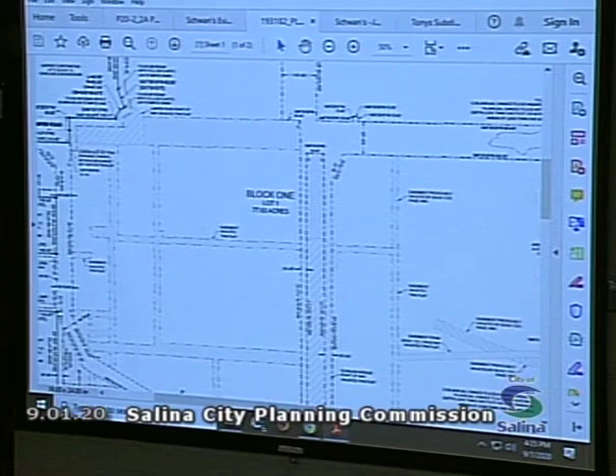So we met with the applicants after the Planning Commission meeting. If you could go to the plat layout, please, John, and zoom in on that, so that we can see what's happening over at Jumper Road. So that, you need to scroll over a little bit so we can see this right in here.

So this was the plat layout. This was presented to the Planning Commission at your August 4th meeting. And because this cul-de-sac was eliminated and not replaced, staff felt like the only thing the Planning Commission could do would be approve it subject to the condition that this remain as is, or they could turn this, eliminate it as a public street entirely and just make it private, in which case a cul-de-sac turnaround would not be required.

So this has been brought back with the applicant asking for the Planning Commission to reconsider your condition of approval at the August 4th meeting, and also requesting a variation from the requirement in the subdivision regulations that all dead-end public streets terminate with a cul-de-sac turnaround. And so this, from the applicant's perspective, this is the plan that they wish to pursue.

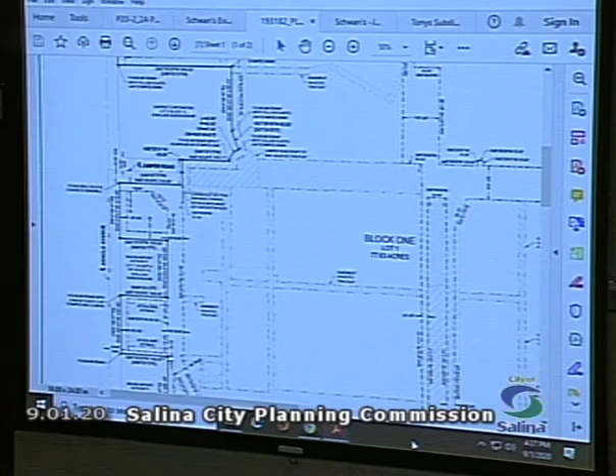At your places, was not present at the time of your packet, but at your places you should find a letter that looks like this. That's from UniFirst Corporation. That was lacking at the August 4th meeting, but that is a letter from UniFirst Corporation that says that they are in agreement with the vacation and elimination of this eastern portion of Jumper Road. John, there's a couple drawings in there that have highlighting on them about the reversion of right-of-way for Jumper Road.

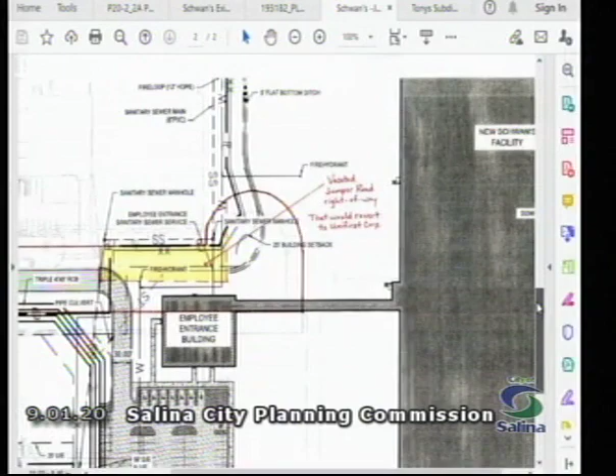Okay, so this is a blow-up of the project site plan. And if you can get it where we can see over it where it intersects with Arnold.

Okay, so this is Arnold Avenue here. This is Jumper Road. The proposal before you is to retain this part of Jumper Road, from here to essentially here, which gets it to where the driveway is for UniFirst, to retain that as a public street, but to not have that terminate in a cul-de-sac.

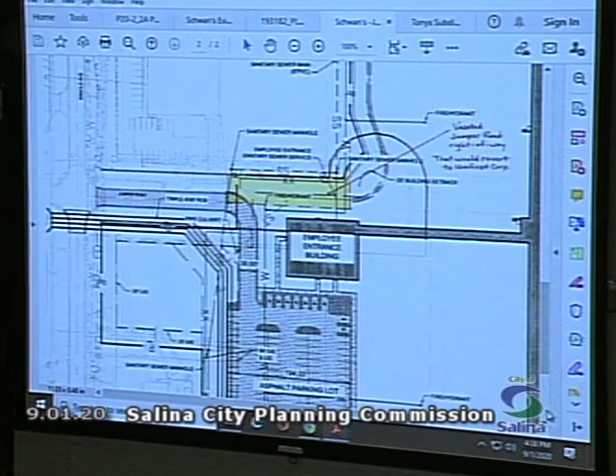So their suggestion as an alternative to that is that emergency vehicles, trash trucks, or others could come in and use this as a means to get back out.

The other important thing about this drawing is that this line right here is the south right-of-way line for existing Jumper Road. As you can see, this employee entrance building is located partially into where that current right-of-way is.

The other thing we wanted to show you, which relates back to the letter from UniFirst that we tried to explain maybe not very well the first time, is that when a street gets closed and vacated like this, it goes back half and half.

So the south half goes to the owner of these lots, the north half goes to the owners of these lots. So you cannot vacate and give right-of-way back to an owner unless they're willing to accept it.

And so the letter that you have at your places there from UniFirst says they are willing to see the street shortened and closed, and they're willing to accept back the vacated right-of-way.

There very well could be a side agreement between UniFirst and SFC Global to transfer the ownership of this to SFC Global, but by law, this automatically goes to UniFirst and not to the applicants on the plat.

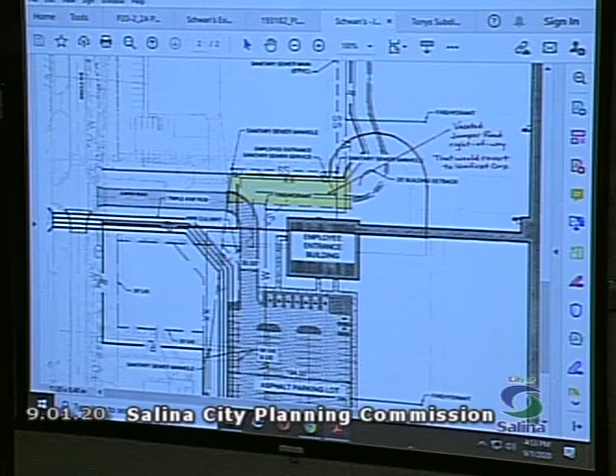All right, I've got, if you guys want to take a copy of each of those, I don't know if there's enough for everyone. That is directly out of the code book, so if you guys want to read it, you're welcome to do that.

I would tell you that parking lots generally don't work very well for fire apparatus that are 30 feet or longer. We just purchased a new Quint. It was approved by the City Commission that we'll take delivery of December of next year. That Quint happens to be 37 foot 10 inches, which is 38 feet. I don't know if any of you guys drive like a crew cab pickup or anything with an extended cab, long bed, pull into a parking lot and try to get turned around.

That's not the way emergency traffic is intended to work. That's why the code is written the way it is, that if we have a dead end that's more than 150 feet, we don't want to be backing out of that, because that's where accidents and injuries happen. And so therefore we would prefer to see either some sort of turnaround or provide a secondary exit out of this parking lot as well as the entrance. That would be our recommendation.

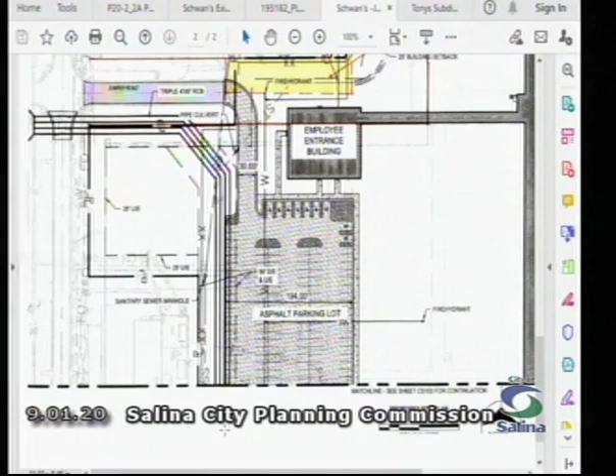That is the site plan. It does show the entire site, because we had a question about the east side as well. The east side goes all the way into almost the north end of the building. Did you get that, John?

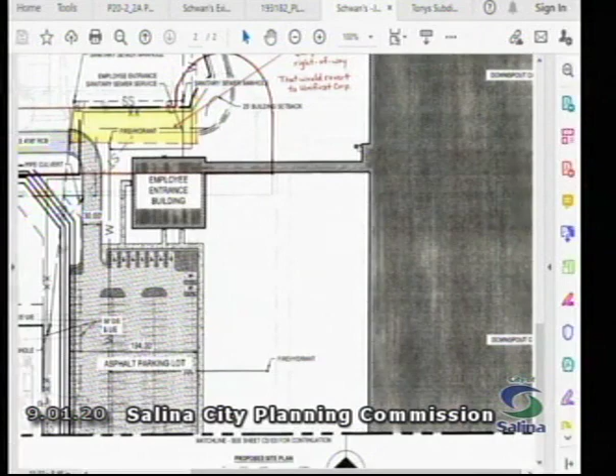So do these turnarounds need to be paved, or would gravel suffice? They need to withstand 75,000 pounds and be maintained in good order at all times.

I'll tell you, if you aren't aware of it, just an estimation, we respond for EMS to Tony's on average about 5 times a month currently. I don't know if this new facility would change that or not, but you're talking about an ambulance that's significantly smaller. But a lot of times the truck assigned to Station 3 is the Quint, in that 37-foot range. So every time we come to this facility, if we go to that west side, we're going to have to back out because we can't go through the parking lot.

Is the entrance to the Schwan's employee parking lot and to the UniFirst Corporation lined up? It's hard to see that. They don't exactly line up.

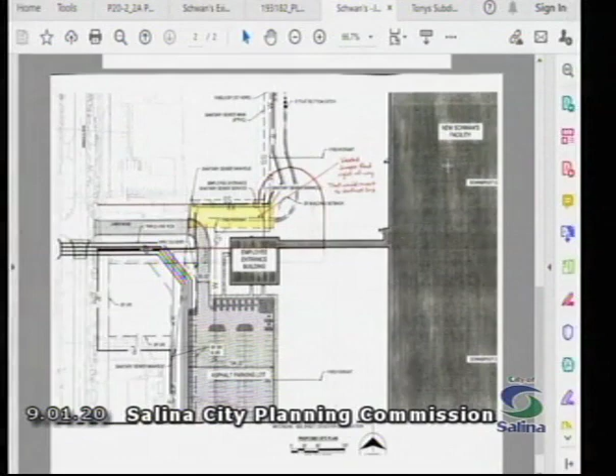If you want to scroll back to the drawing you were just at, John. So it's faint, but this is the entrance into UniFirst right here, and this is the proposed entrance into the employee parking lot. So they don't exactly line up.

Again, just for your benefit, this is a series of pipelines, associated with their drainage system. But if you could go back to the other drawing please, John, the top drawing, the full site plan.

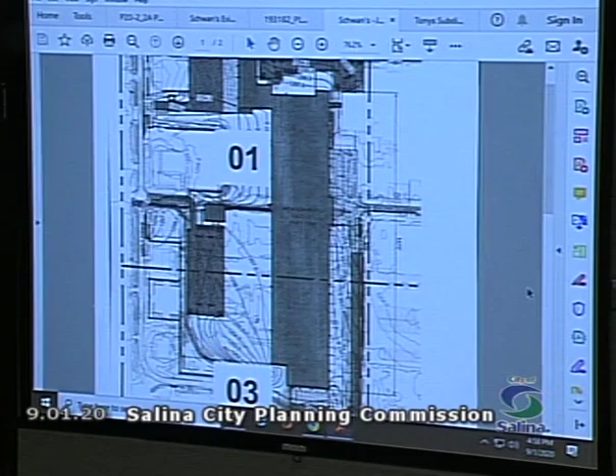So what I think I understand you saying, Troy, is that this is an entrance in, there's a parking lot. If there was a circulation back to get back out to Arnold, there wouldn't be a necessity to turn around or back out, that this circulation pattern could be used, and then it wouldn't be the dead-end situation of being forced to potentially back out. But then also, if the entrance to the UniFirst Corporation parking lot and the employee parking lot of Schwan's lined up, then it'd be easy to back up into one parking lot or the other.

Is that not correct? Sure. We typically don't like to use private property to turn fire apparatus around. That's just typical. That's why our city codes require that we have a cul-de-sac at the end, something that we maintain, because we have a more difficult time to make sure that, say, the UniFirst parking lot starts going downhill. We may not have the facility or the ability to get them to correct that. So if it's a city street, if it's an issue for us, we can get them to fix that.

So even what we're indicating is, even in situations where we have a couple in the community where we have hammerhead turnarounds instead of a full circle, the hammerhead is located in the city right-of-way and is part of the public street that we maintain. So I think what you're saying, Mr. Baff, is if this driveway was exactly opposite, it would almost be like a hammerhead configuration.

Exactly. But as Mr. Long pointed out, the flip side of that is that we don't have any control over how those are maintained, or if they're maintained.

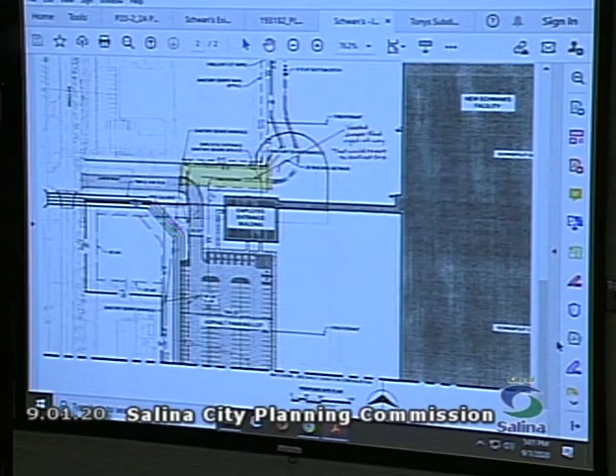So again, John, if you could go back to the upper site plan. So this is the full building here. This is Arnold Avenue down here by the airport terminal. It comes around here, and it's an odd situation, but the airport authority is going to be retaining this lot and this lot, but this lot will become part of the campus and part of the ownership. So potentially there would be the ability to construct an outlet road over here.

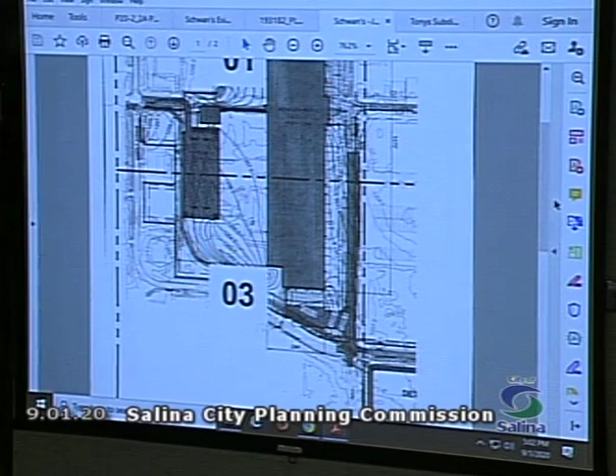And so that would be a private access road, correct? It would be a parking lot access road, yes. So you'd have a situation where just this portion of Jumper from here to here would be a public street.

It would basically terminate into this parking lot instead of having a turnaround. To us, the alternative of having a turnaround here would be to have circulation here. So if a vehicle could circulate, then it wouldn't need one. And what's not clear, and we do have a representative of the applicant here, is whether this lot is gated or restricted, or if there's full access into it, and that's something the applicant's representative could share with us.

Since one of the public safety purposes of having the cul-de-sac turnaround is that there are often cases when emergency vehicles get called out and then get another call, they have to go respond to that, and we don't want to be in a situation where they're stuck or having to do a backup maneuver to get back out and either take somebody to the hospital or respond to another call.

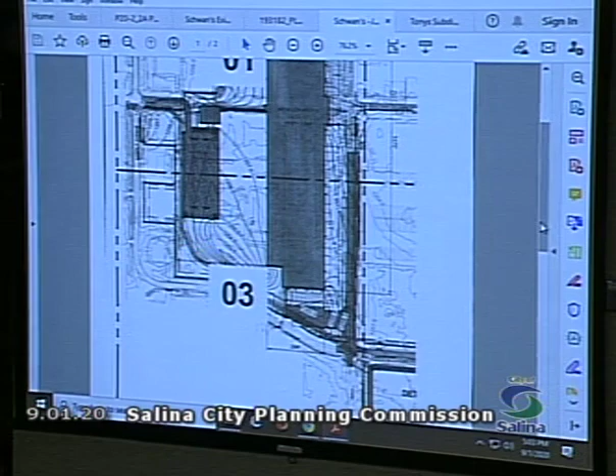And that's the other concern we have with this one-way-in design into the parking lot. If we happen to get there at a time when a shift is getting ready to exchange, now we run into it, and we talked about, what, 250 jobs out here? New, potentially, yeah. So now 250 vehicles coming into that parking lot at shift exchange while we're trying to do what we do, and a fire truck's 8 feet wide, so we're going to block a majority of the one lane.

So it could be a challenge. Whereas if there was a cul-de-sac at the end of that, we could pull out of the way so people could get by us, or if there was an exit, we could move the truck so it wasn't in the way. So perfect world solution, your choice would be the 96-foot cul-de-sac? Yeah, that would be our preference, but...

I wonder which solution is more cost-effective. I guess that would be a question for the applicant.

I will tell you that we received these drawings 10 days ago to do a plan review of this. And part of my plan review notes sent back to the engineering firm is that they're going to have to do something for us turnaround-wise. As I said, on the east side, Scanlan goes up in there a ways, and then there's a fire hydrant about 80 feet from the north end of the building that we could actually get to, but they're going to have to put signs around that area that say 'no parking, fire lane' so we can have access to get turned around. It's in the same situation.

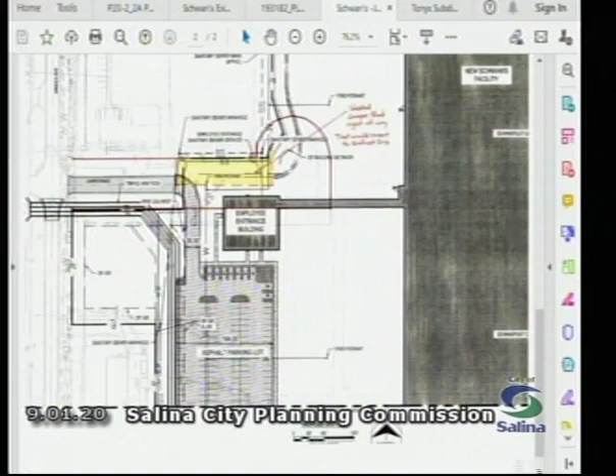John, could you go back to that highlighted site plan again? The one that shows the vacated right-of-way? Okay, well, as you can see, this line right here is the north line of the right-of-way, and this right here is the turnaround. The primary obstacle seems to be right here, and I'm assuming that's the north line of the building.

So I guess we'd have to, it's difficult to see, but it appears that the traveled path for jumper is maybe running right up next to this building. So I think one question is whether this building could be shifted south at all. The other thing would be whether the existing road could be adjusted northward at all.

But as I understand your comments, Troy, your preference would be if this, since it's already there, could be retained, and that would still be available as a means to get back out. Leaving it in its present configuration would be the preferred alternative if there was not a new turnaround constructed here, correct?

Yeah, the problem with the existing one that's there currently is that we lose about a third of it with the design of that new building. So we'd almost need to move that back to the west and try to get the full 96-foot diameter turnaround. You're talking about somewhere in here? Yeah, somewhere in there.

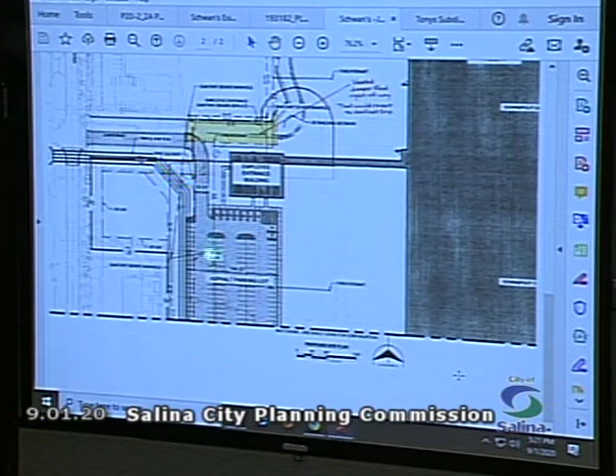This is 30 feet wide, this seems to be 24 feet here, and if they don't feel comfortable that the 24 feet might not be obstructed in some places, that's why in an ideal situation they don't want to use the parking lots where there's parked vehicles for circulation.

To have that work, the circulation down here, this aisle has to be sufficient width, not necessarily for turning around, but just to do that maneuver, because it's one thing to navigate a parking lot that's empty, it's another thing to navigate a parking lot that's full of parked cars. So that's the concern.

There's a lot of moving parts to this project in terms of building permit plans and review, site plans and things like that. One disadvantage we had is that at the August 4th meeting, we couldn't bring you any information about a site plan and design plans because we didn't have an announced project.

But one thing we thought about before this meeting, with our COVID-19 response, we set ourselves to having one meeting per month. But one option that we do have is that we could...

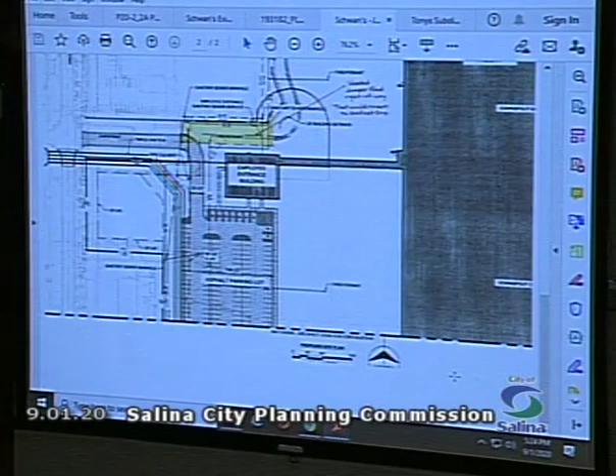If you were to deny the variation, that would take off the table the option for circulating the parking lot and coming back out there. So that's just the option, if there was any interest in considering the variation with the ability to have a second outlet here.

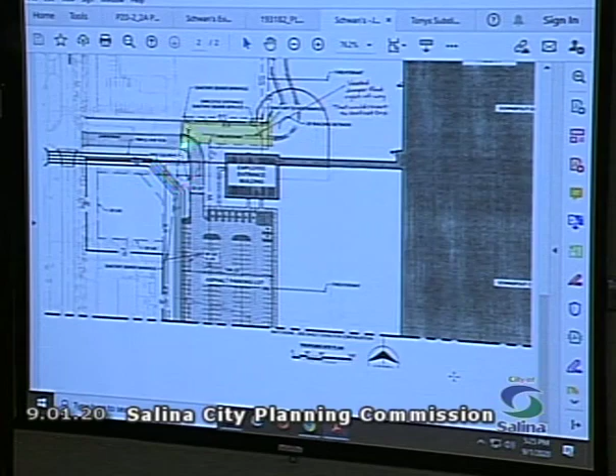One option would be to consider scheduling a special meeting on the 15th and looking at that option being fleshed out. Or the other option is to take action on the variation request today, and if the variation is not approved, there would only be two options: leave it as it is here, or relocate it to a location farther west.

Are you in a hurry? Well, we're always in a hurry, right? There are permitting aspects to the overall project that would be impacted by waiting a month.

I think at least from our perspective, and we want to be respectful of everybody's time, your time, the Salina Fire Department's time, we want to respect that. But from our perspective, I think we could have a solution in conjunction with Salina Fire Department, working with the design team, by the 15th. I don't think that's unreasonable from my perspective.

Sounds reasonable to me. We're okay with it, I'll make that motion. I would second it. So just for clarification, it's a motion to postpone consideration of the proposed replat to a specified future meeting date, which would be September 15th, two weeks from today.

So essentially, you'd be agreeing to hold a special meeting on the 15th. Normally you would have had a meeting there, but with COVID-19 we went to once a month, and that date's available. So the motion is to postpone consideration to a special meeting on September 15th and to allow staff to work with their design team to come back with alternatives, staff and the fire department.